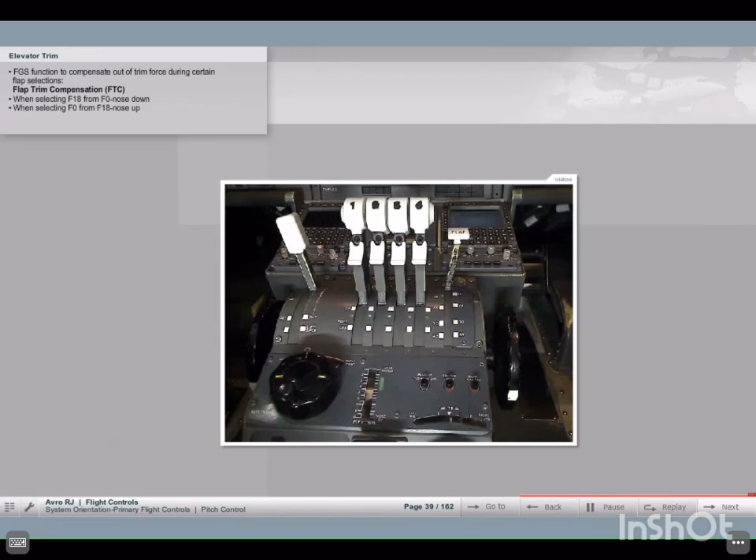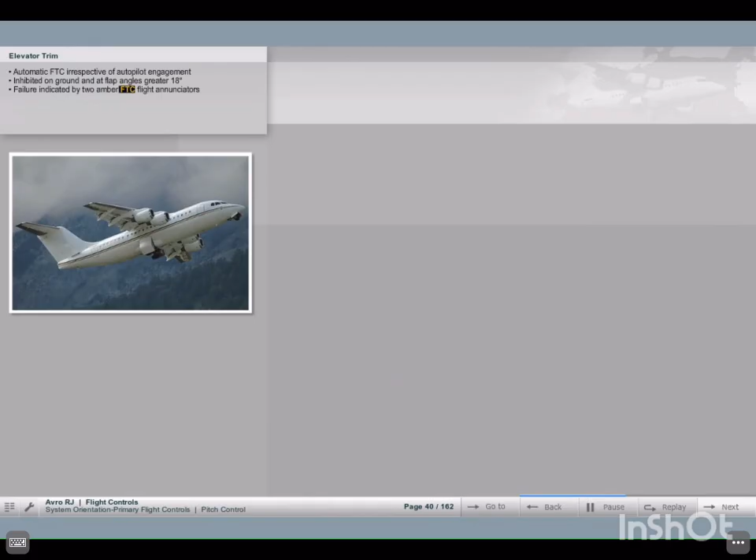Flap trim compensation, as a function of the flight guidance system, operates independently and automatically, irrespective of autopilot engagement. It is inhibited on the ground and at flap angles greater than 18 degrees. A failure is brought to the pilot's notice by two amber flight annunciators, one on the left and one on the right flight instrument panel.

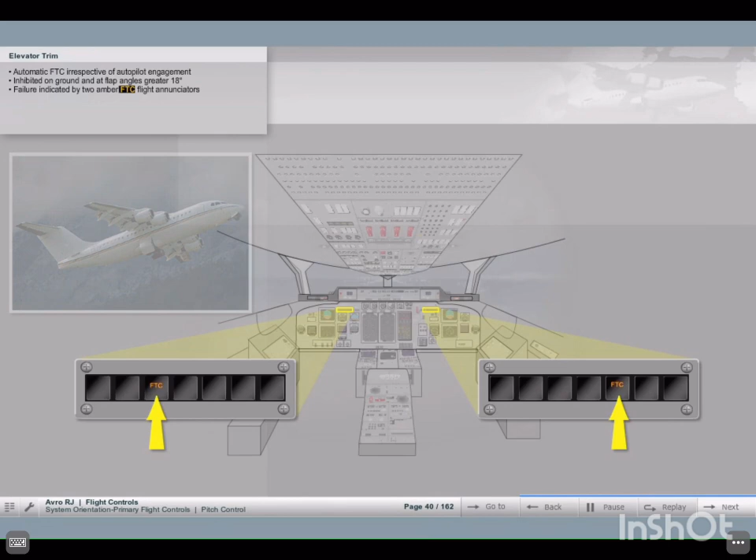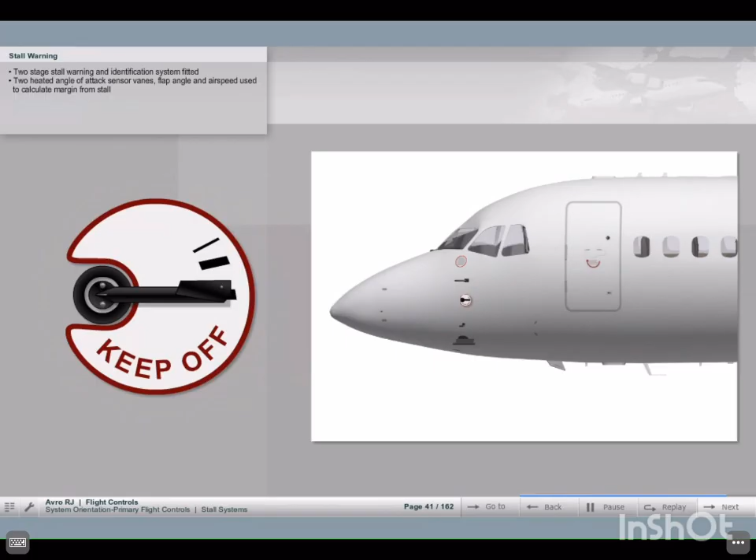The Avro RJ is fitted with a two-stage stall warning and identification system. Two heated angle of attack sensor vanes are installed, one on the left and one on the right side of the cockpit. Flap angle and airspeed are used to calculate how close the aircraft is to a stall condition.

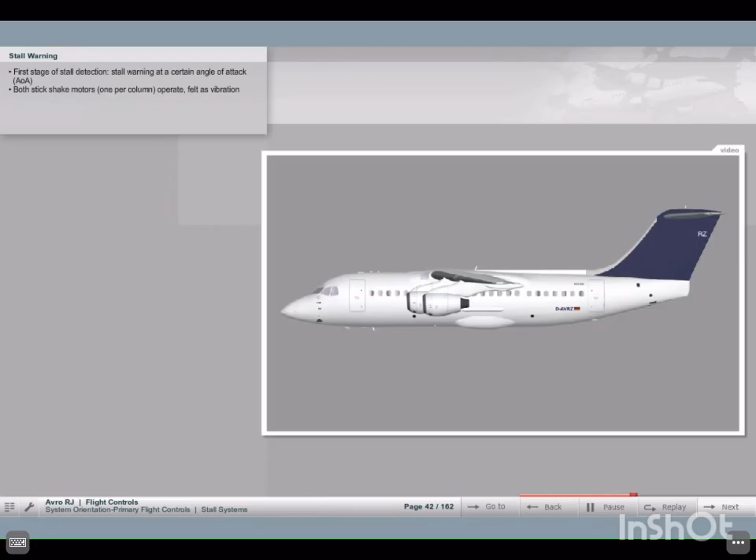The first stage of stall detection is the so-called stall warning. At a predetermined angle of attack, resulting in a speed 5% above actual stall speed, both stick shaker motors, one on each column, operate. This is felt as vibration and can also be heard.

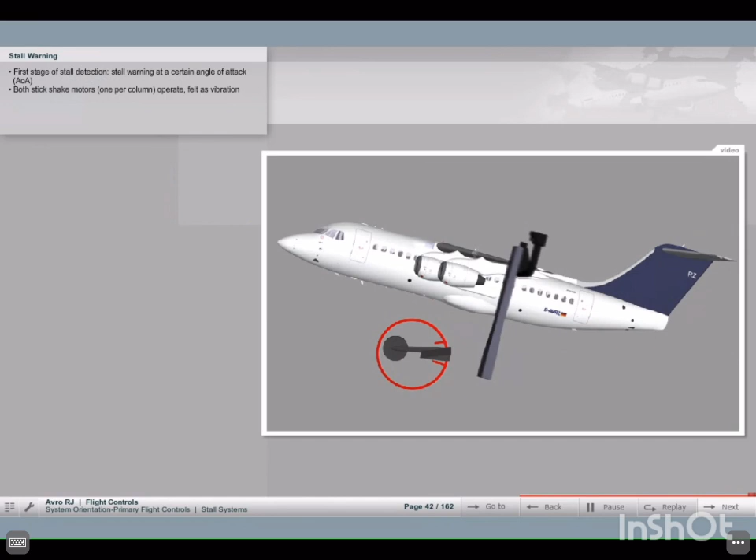Stall warning is signaled by two warn units. Each unit is connected to the opposite vane. One vane signaling a warning angle of attack is sufficient to produce a stall warning.

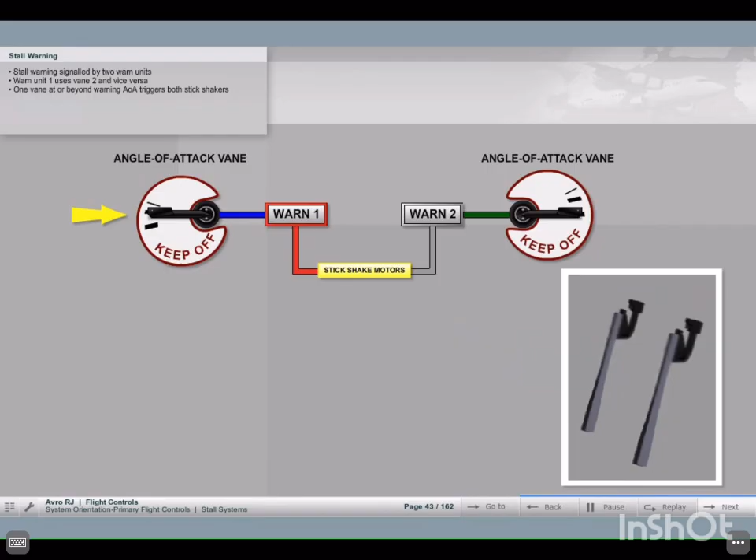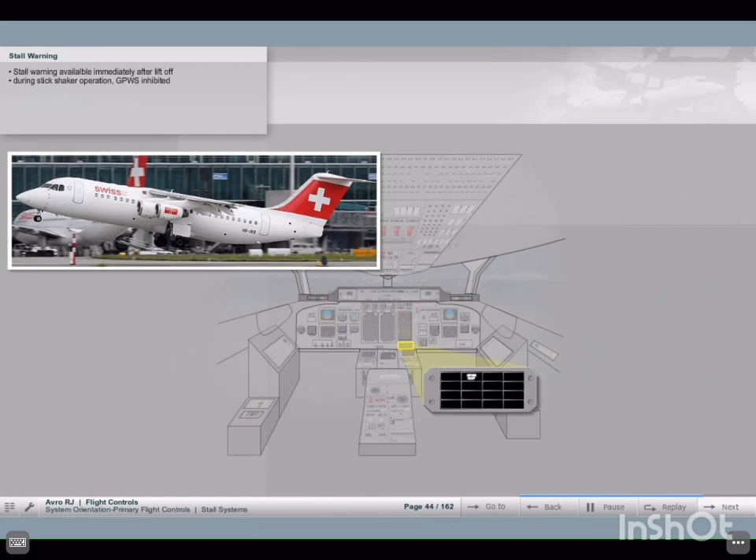The stall warning is available immediately after liftoff. During stick shaker operation, the ground proximity warning system will be inhibited, which is indicated at the central status panel by a white caption.

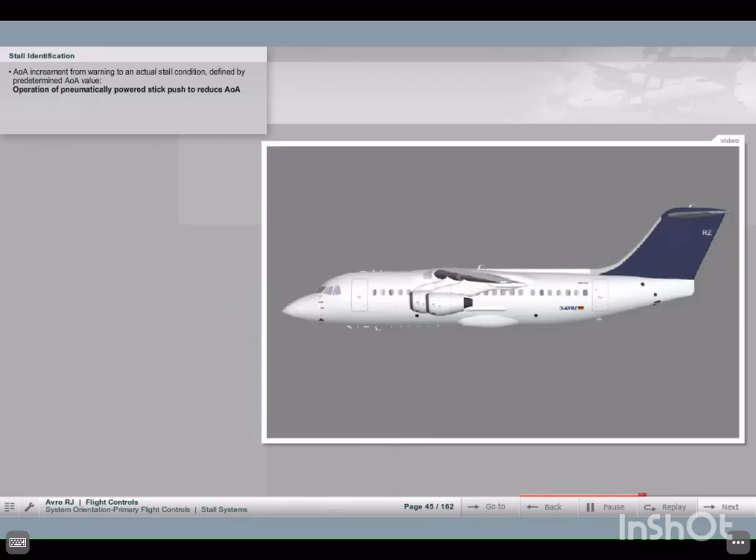When the angle of attack is further increased from a stall warning condition to an actual stall condition, defined by a second predetermined angle of attack, a stick push powered by a pneumatic ram will force both control columns forward, which will reduce the angle of attack.

Stick shakers and stick push operate as long as the relevant angle of attack persists.

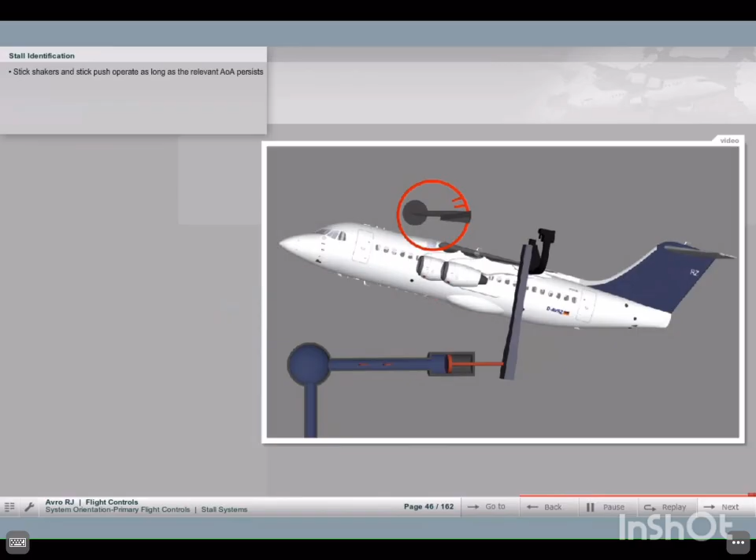The stall identification is signaled by two identification units. Each unit is connected to its on-side vane. Note that the warn and ident units are connected in their respective channel.

Channel 1, for example, will only signal a stick push if the left vane is at stall identification angle of attack and the right vane is at least at a warning angle of attack. This system design will prevent a stick push should one vane be mechanically jammed at an identification angle of attack.

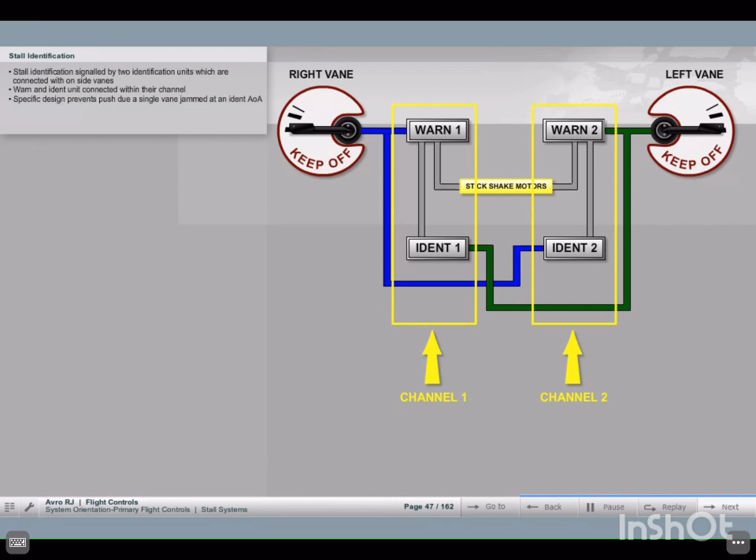One channel, that means the ident unit and its associated warn unit, is sufficient to operate a stick push. Both stall valves will then be opened by either ident unit, which will allow bleed air from a reservoir fed directly from engines 2 and 3 to enter the stick push ram. This in turn pushes both columns forward.

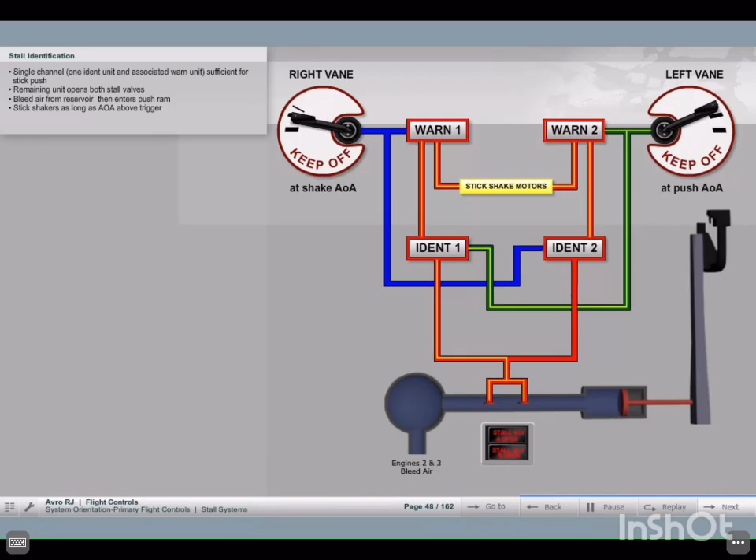Stick shakers will be operating as long as the angle of attack is above their trigger point. The red stall valve A or B open. Flight annunciators are located on the left and right flight instrument panels next to the primary flight display.

The whole stall identification system is available in flight 7 seconds after liftoff.

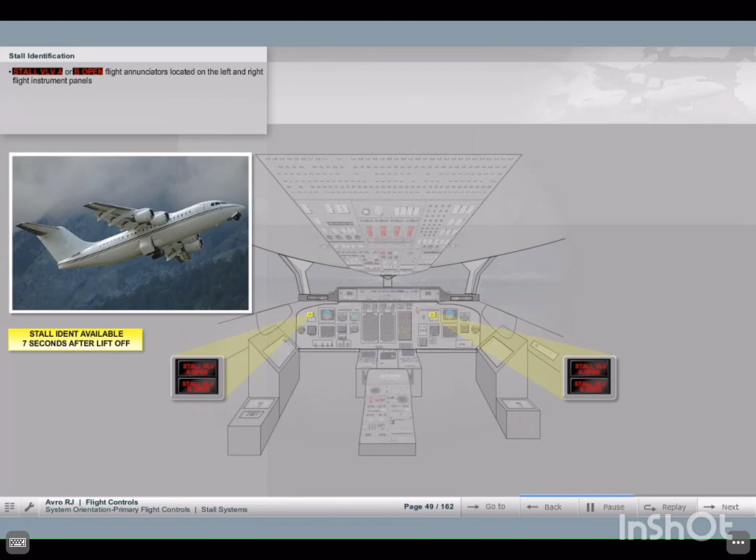If either identification unit detects an angle of attack greater than its trigger point and its associated warn unit has not operated, a stick push is not released, but the following warnings are given: an amber central warning panel caption, stall ident, and two amber flight annunciators, ident 1 or 2, on the left and right flight instrument panels.

The faulty stall identification unit is then inhibited by pressing its ident push button. As soon as it's inhibited, inhib illuminates in the button and the system reverts to single channel operation. Reset is not possible in flight.

The entire stall identification system can be inhibited at any time, for example during an uncommanded stick push. In that case, push both buttons simultaneously. Ident 1 and 2 times inhib is then illuminated on the left and right flight instrument panel.

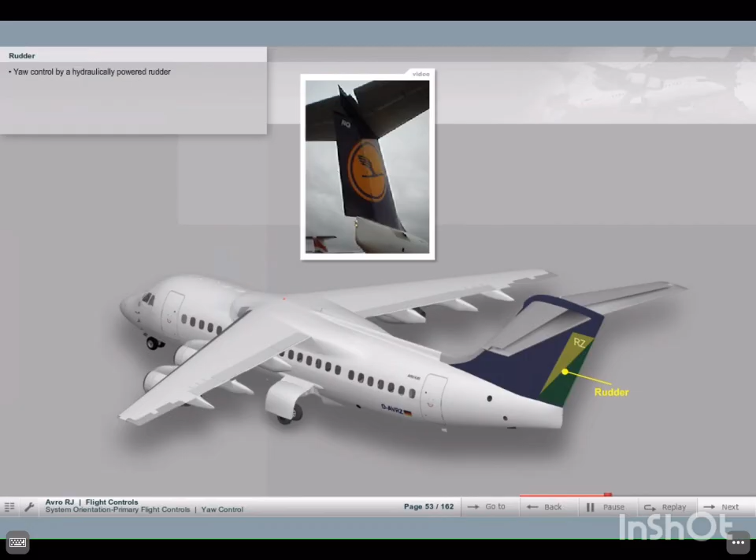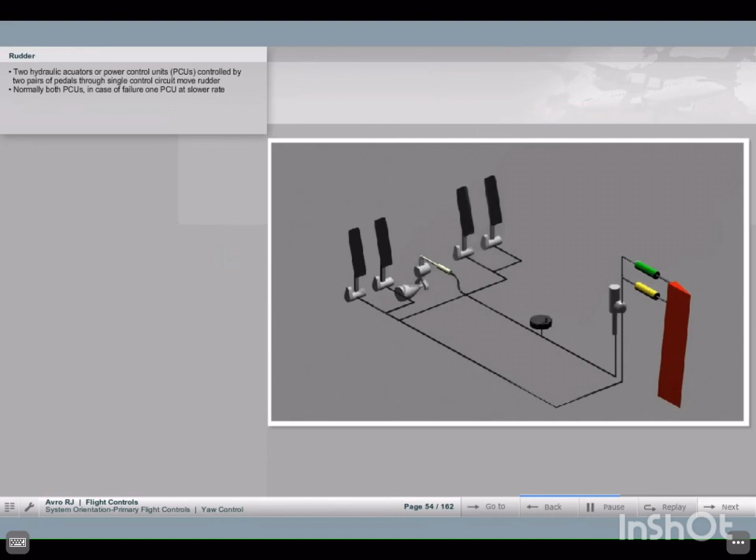Two hydraulic actuators, or power control units (PCUs), one of the green and one of the yellow system, are installed at the top of the fin and controlled by the two pairs of rudder pedals through a single cable control circuit. Normally, both actuators together move the rudder, but in case of a failure, a single actuator is able to control the rudder at a slower rate.

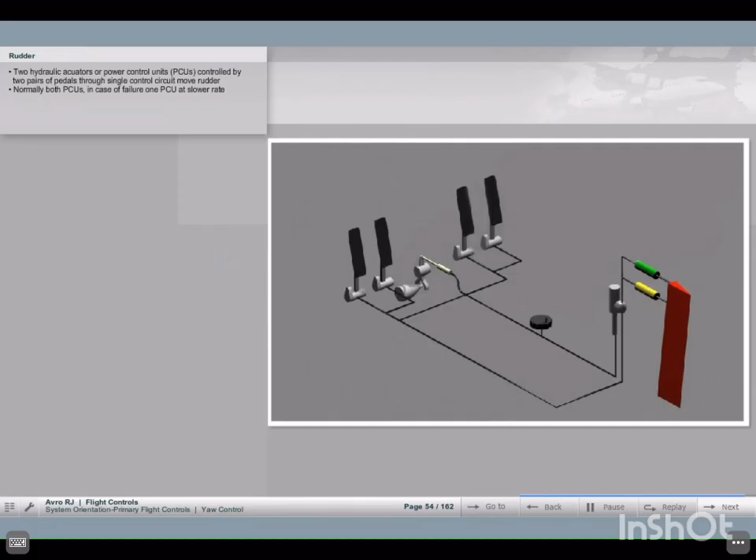Each actuator has a microswitch, which brings on the amber central warning panel rudder valve caption should one actuator stick mechanically. Additionally, on the ground, this caption is lit should one hydraulic system be at low pressure state.

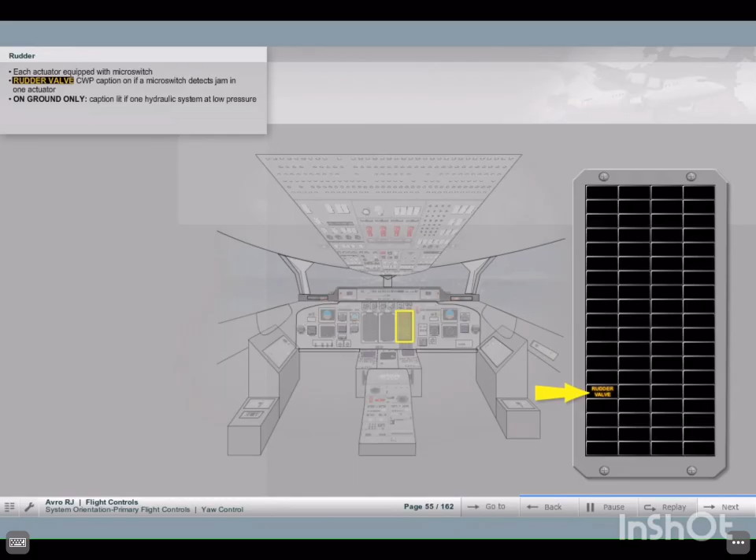Artificial feel through the pilot's rudder pedal is provided by a spring strut, which increases the load on the pedal proportional to pedal travel. Note that the load is not increased with increasing speed.

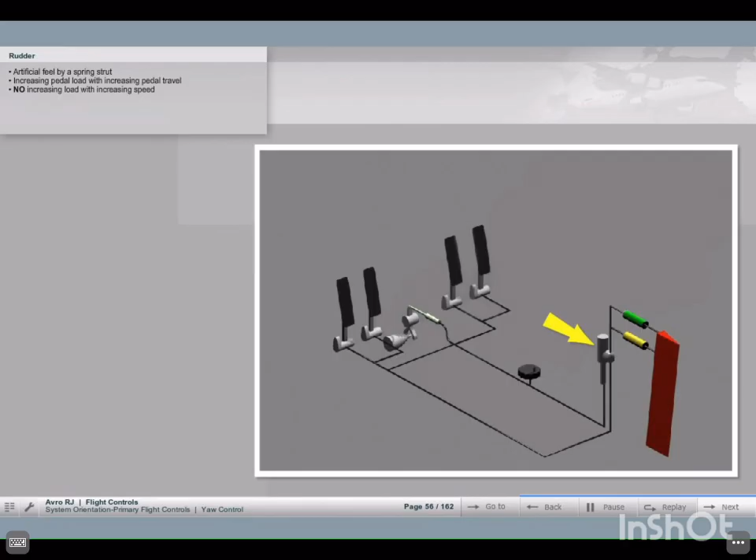A Q limiter restricts the amount of rudder travel with increasing airspeed to prevent structural damage. The maximum value of rudder travel is 30 degrees right-left at or below 160 knots, linearly decreasing to 2 degrees right-left at 300 knots.

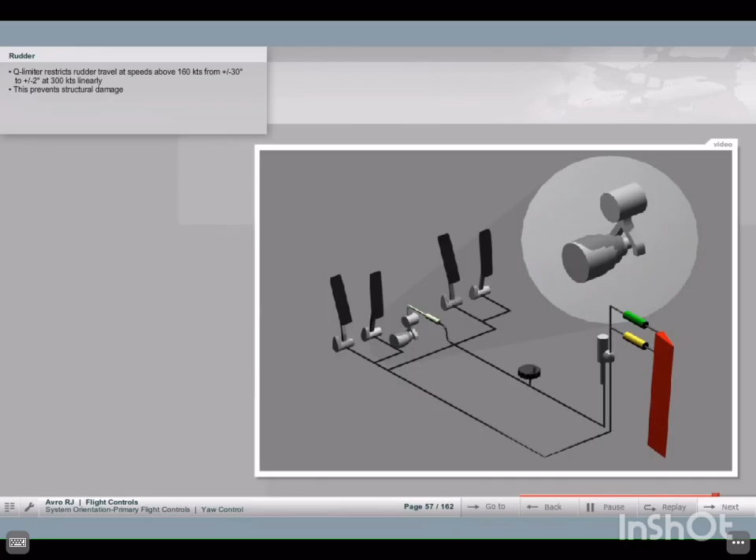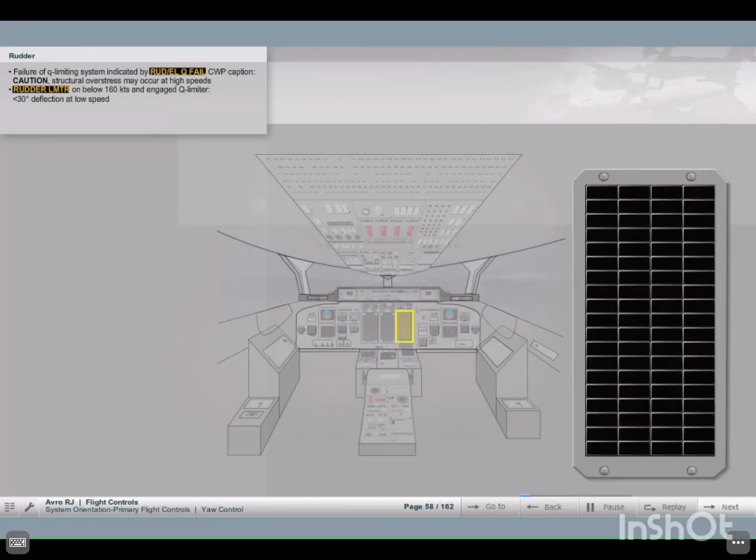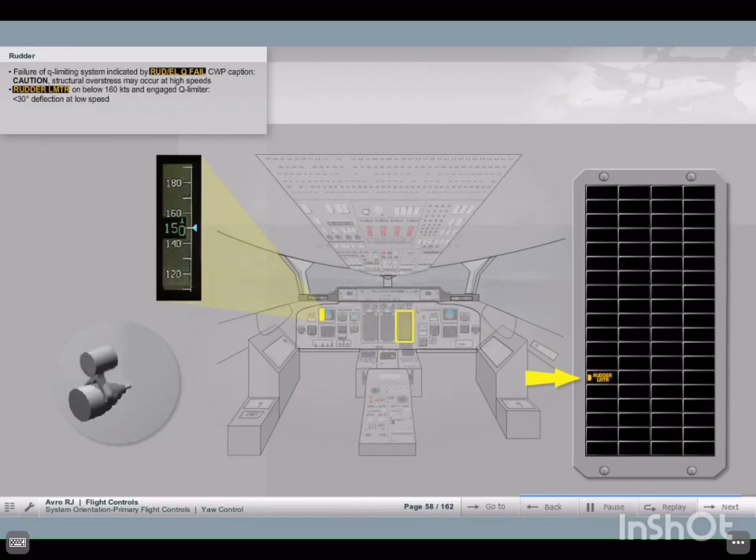A failure of the pitot-static supply to the Q-limiting system is indicated by an amber central warning panel rudder elevator Q fail caption. It is important to know that this failure could lead to structural damage to the aircraft, as rudder movement might be up to 30 degrees, also at high speeds. The amber caption rudder limiter will come on below 160 knots, and if the Q limiter is still engaged, this in turn means that the full rudder deflection of 30 degrees will not be available at low speeds.

No rudder trim tab is fitted. The rudder is hydraulically offset from neutral when trim is applied. For that, a trim wheel is fitted on the center console. Trim position is indicated in a window above. Trim is neutral when both the marker in the window and on the hand wheel are aligned. Trim has to be neutral for takeoff.

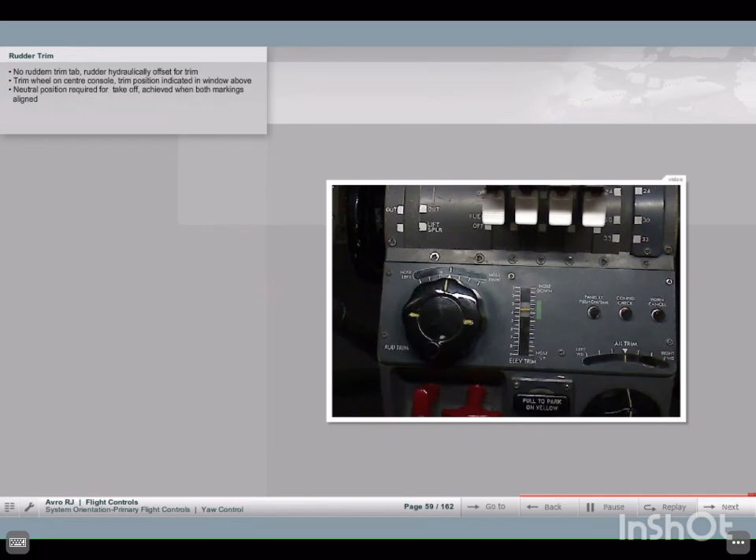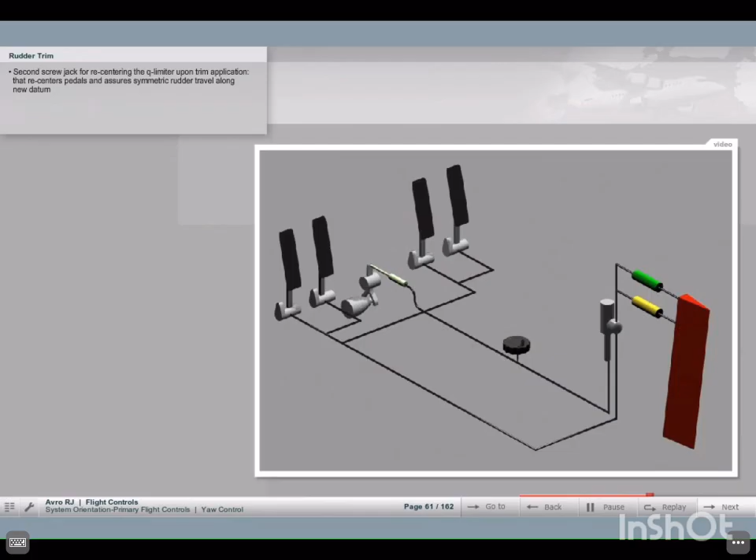Rudder trim is only available when the hydraulic systems are pressurized. The trim wheel operates two screw jacks. One repositions both actuators and in turn the rudder according to pilot's input via the trim wheel. The second screw jack is needed to recenter the rudder pedals, as they would otherwise move away from neutral with trim application. For that, the second screw jack repositions the Q limiter to neutral. Thereafter, a symmetric rudder travel along the new rudder datum is assured.

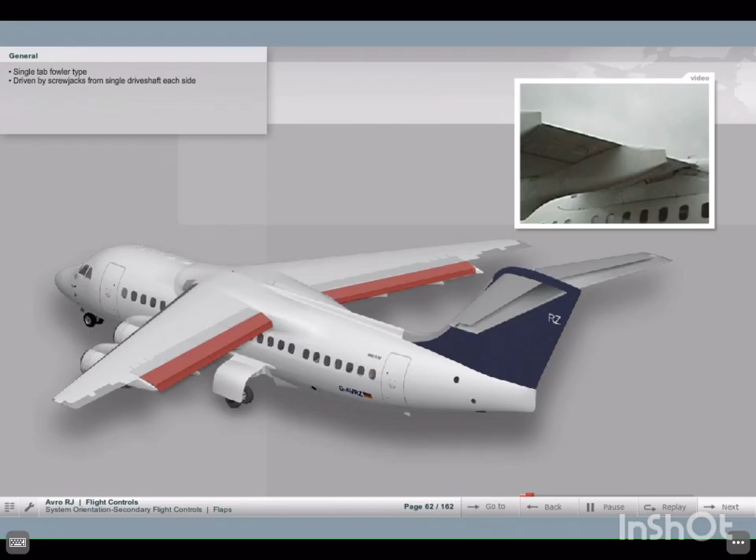The flaps are of the Fowler type and driven by screw jacks from a single drive shaft on each side. Each flap is not interrupted and extends from the wing root to the aileron.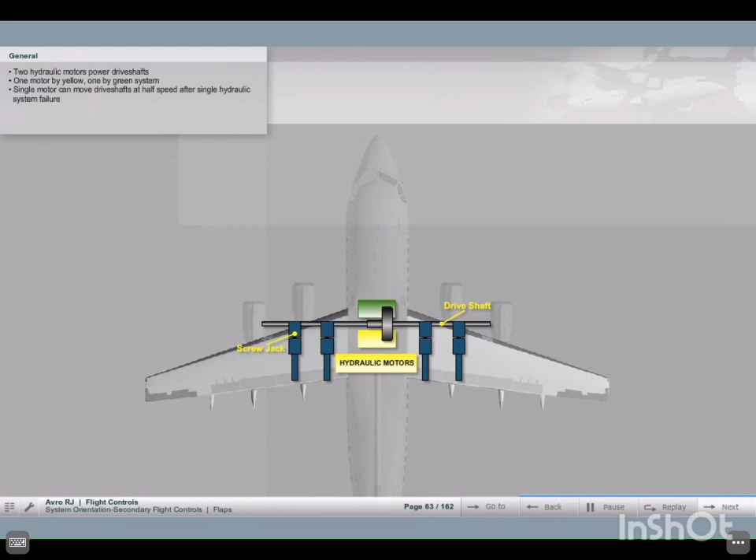The drive shafts are driven by two hydraulic motors, one powered by the yellow and one powered by the green system. Each motor can drive both shafts, so flap travel, although at half speed, is available after single hydraulic system failure. The two motors are signaled electrically by the flap selector on the center console. The signal is routed via the flap computer in the avionics bay to the hydraulic motors, which apply internal brakes as soon as flap position matches the flap selector lever position.

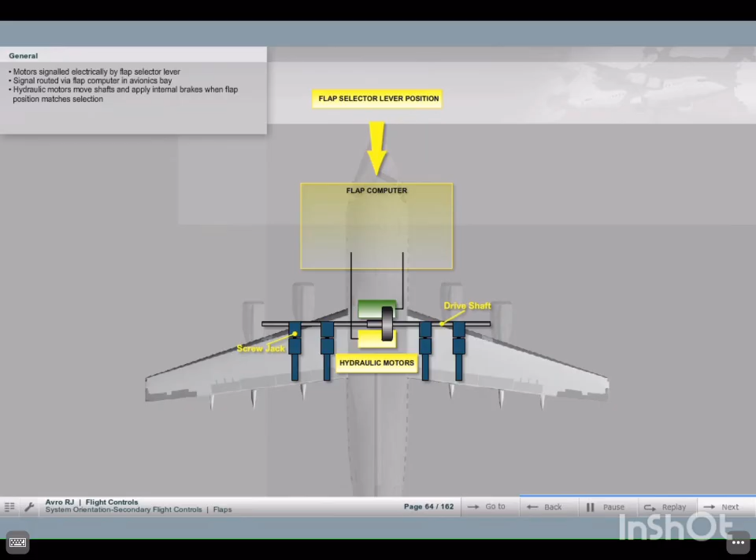Flap position is confirmed on a flap position gauge powered by essential AC on the center panel. In case of failure of that gauge, for example due to an electrical problem, flap position is indicated by markings on the inner pylon number 2. This marking cannot be seen from the cockpit.

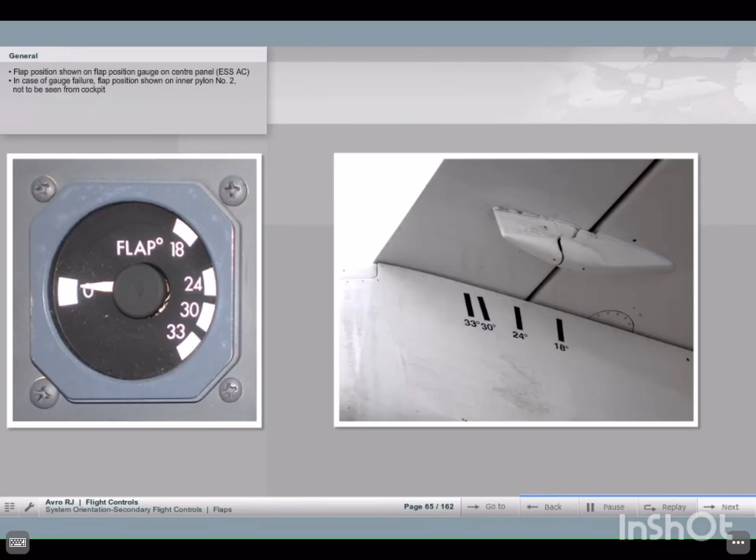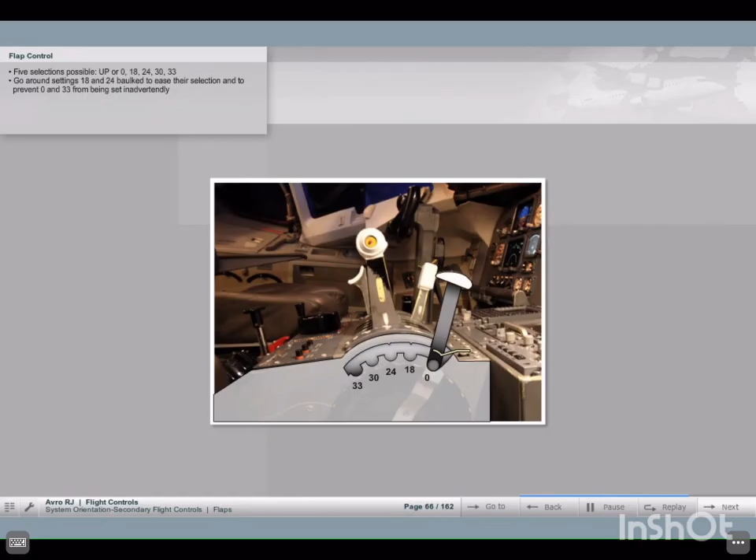Five positions are selectable: up or 0, 18, 24, 30, and 33 degrees. The 18 and 24 degree position go-around flap settings are balked to aid their selection and to ensure the flap up or 0 and 33 are not selected inadvertently.

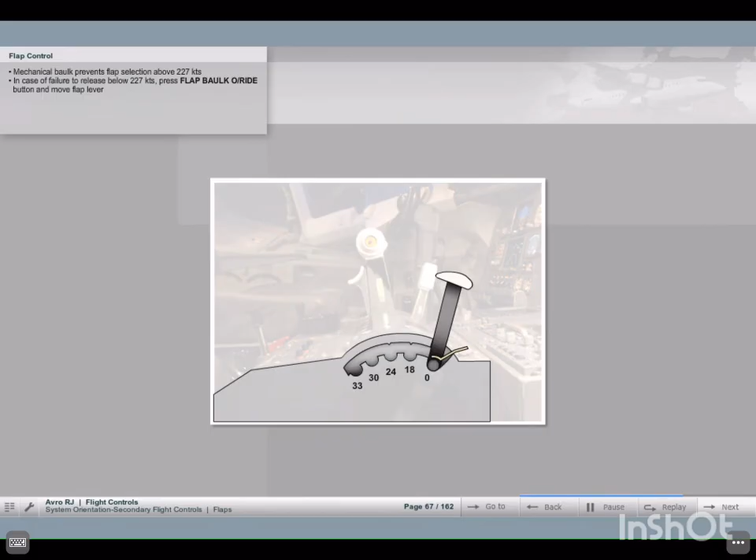Flap extension from 0 to 18 is limited to 205 knots on the RJ70, 215 knots on the RJ85, and 220 knots on the RJ100. However, mechanical balk prevents the flap lever from being pulled out at speeds greater than 227 knots. The pilot can override the balk by pressing the FLAP BAULK O/RIDE button in an emergency situation or if the balk fails to release below 227 knots.

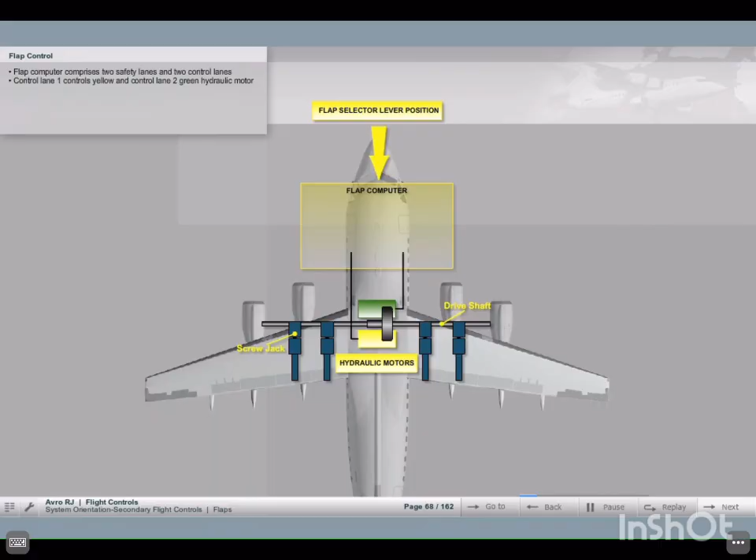The flap computer is comprised of two safety lanes and two control lanes. Control lane 1 controls the yellow hydraulic motor, control lane 2 the green hydraulic motor.

Normally, both control lanes are operable and the flaps will run at normal speed. If one control lane fails, the entire flap system can be operated from a single control lane at half speed.

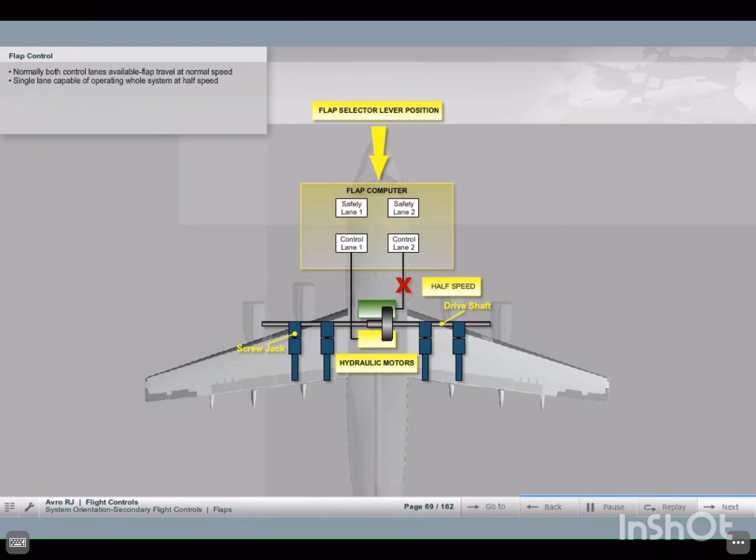Two safety lanes monitor operation of the system and provide fault protection. Safety Lane 1 provides protection against flap asymmetry and information for the flight recorder and the flap gauge. Safety Lane 2 is a monitor of both control lanes and able to shut both control lanes.

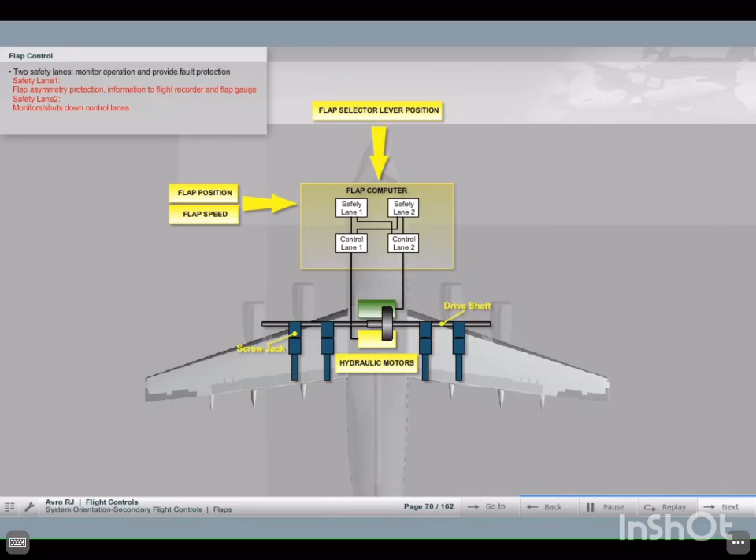A minor system degradation is indicated by an amber central warning panel caption, "Flap fault." Flaps are operative at half speed. Reasons for a flap fault are flap lever position does not match actual flap position, flap selections with one hydraulic...